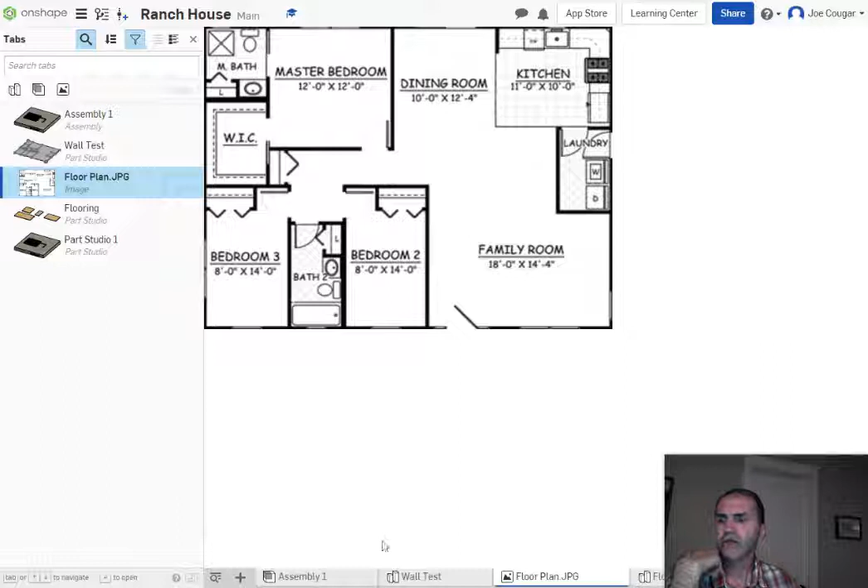So here we go. Let's start a new one, and by the way, I am in this - I know you don't have that floor plan picture, but I do. So start a new part studio. Now when this pops up, let's rename this part studio, and we're going to call it studs. This is where we're going to go to get all our vertical structural members.

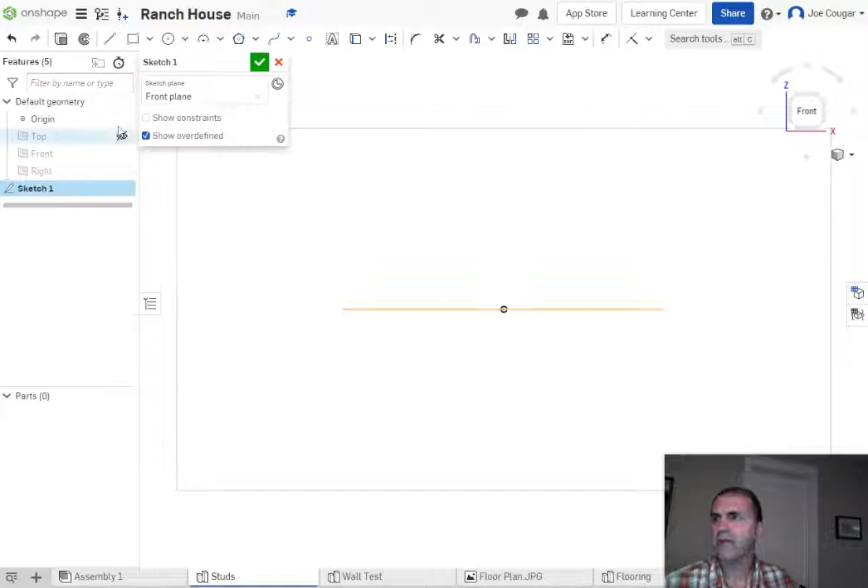Okay, now for this one we're going to sketch in the front. So hover over the front, right click, and say I want to make a new sketch. P turns off planes, N gets you perpendicular, and I also will turn off the origin point because it doesn't matter. All right, now we're going to make a bunch of things.

I'm going to make several boards, even more than I'm going to need, just to prepare. So we're going to make one little rectangle here. Corner to corner rectangle is my command. It is going to be - whoops, I accidentally clicked off of it. If that happens, just use your dimension tool like I just did.

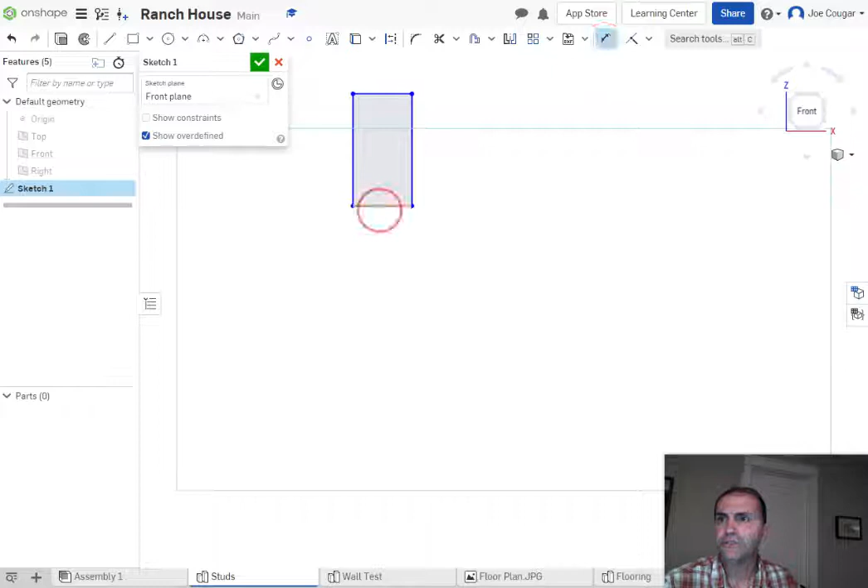And the one dimension is going to be 1.5, because this is all going to be 2x4 construction. Enter. And the other way is going to be 3.5. Now we'll talk about why this isn't necessarily right, because most houses have 2x6 construction on the exterior walls these days, but we're going to deal with that anyway.

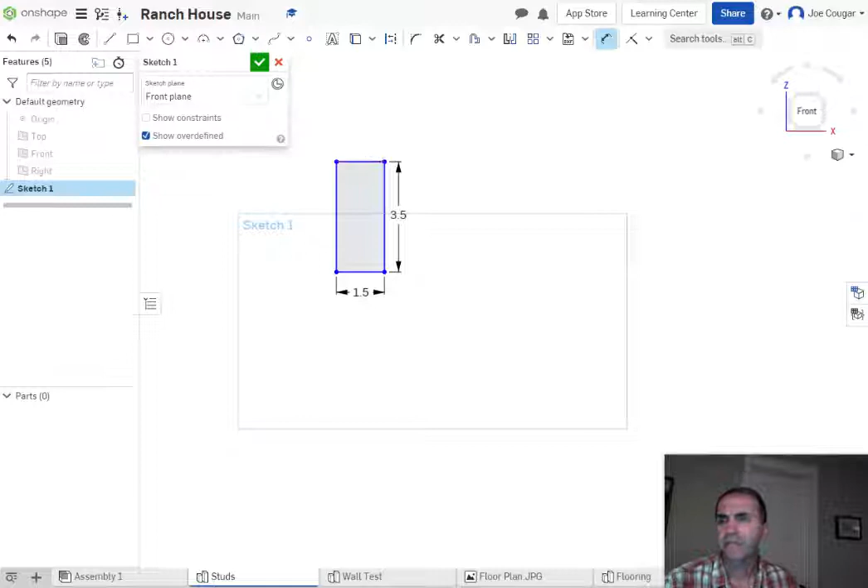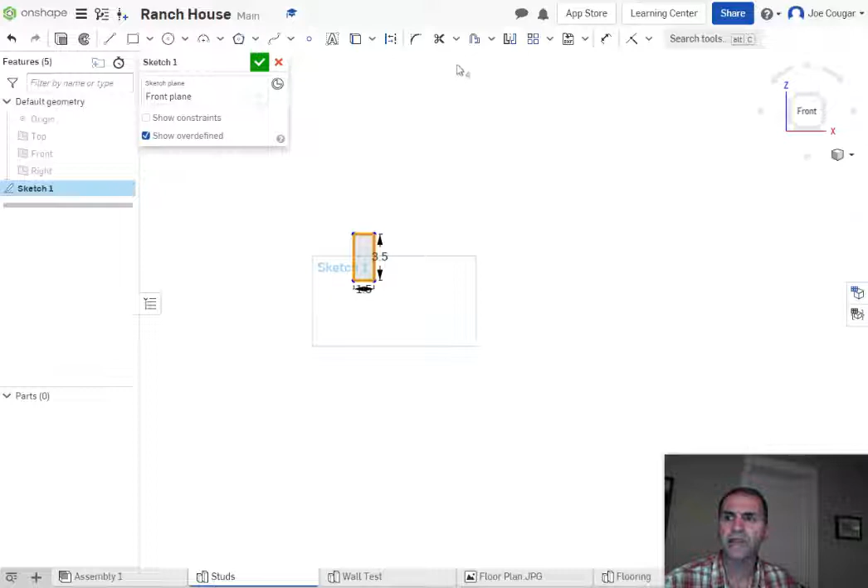Now let's zoom out a little bit. I want to make a pattern out of this, okay, because I'm going to make a bunch of them, like 10. So I'm going to escape to get out of that command. If you click on the mouse and then, as you're holding the mouse button down, drag, it selects what's there. So I'm selecting everything, and I am going to make a pattern out of this.

Now, up here are different types of patterns. I want to make a linear pattern out of that. Now, whoa, that is weird. I don't know what that is. Oh, okay, yeah, this isn't usually the way this works.

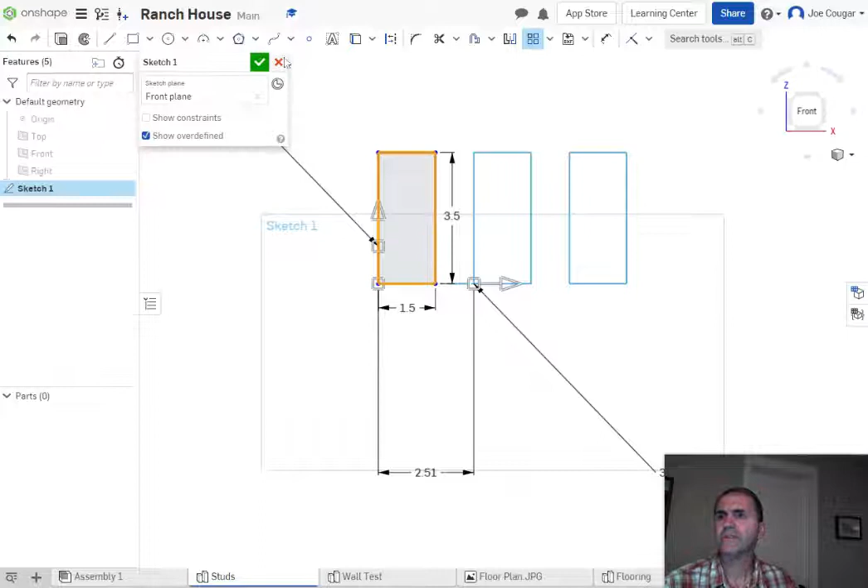Okay, so I'm going to undo that. Sorry, I forgot that this is different than the other programs that I'm used to. And I undid my dimension. There we go. All right, so let me start from the beginning.

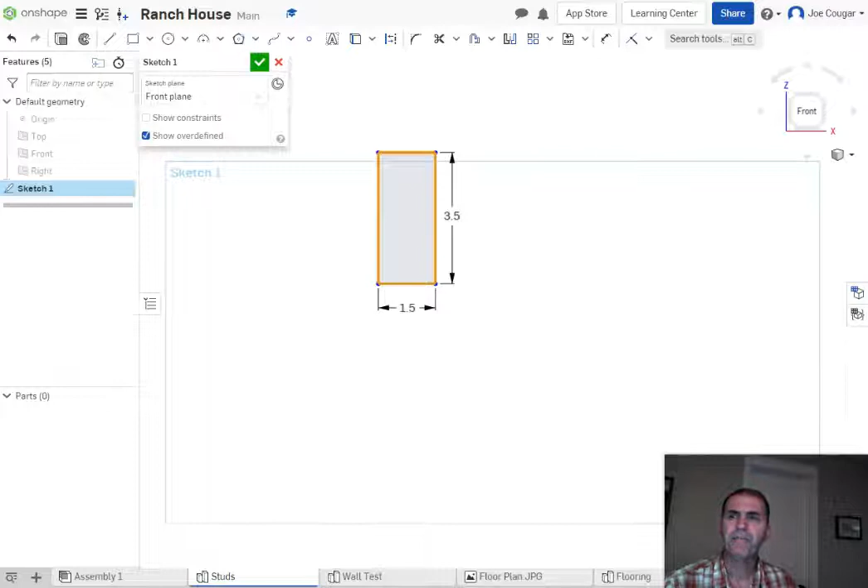We're going to drag a box by holding down on the left mouse button, dragging across to get that. And I'm going to hit linear pattern. Now it's kind of weird the way it shows up like this. It gets a little confusing.

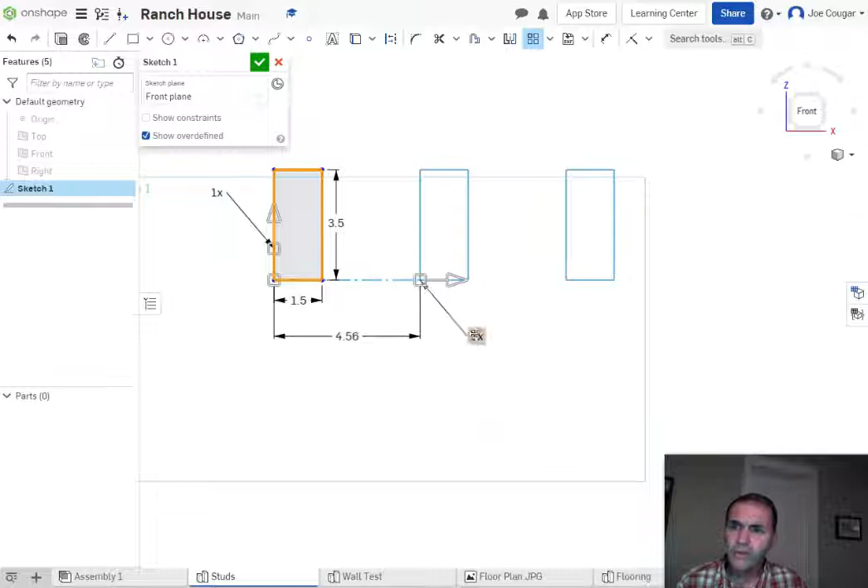So what you're going to do is drag this arrow and pull out. Now it shows you how far apart they are, but by default it will give you 3 of them. So what you do to change that is click where it says 3 times, and let's make that 5. I had to double click it. 5, enter.

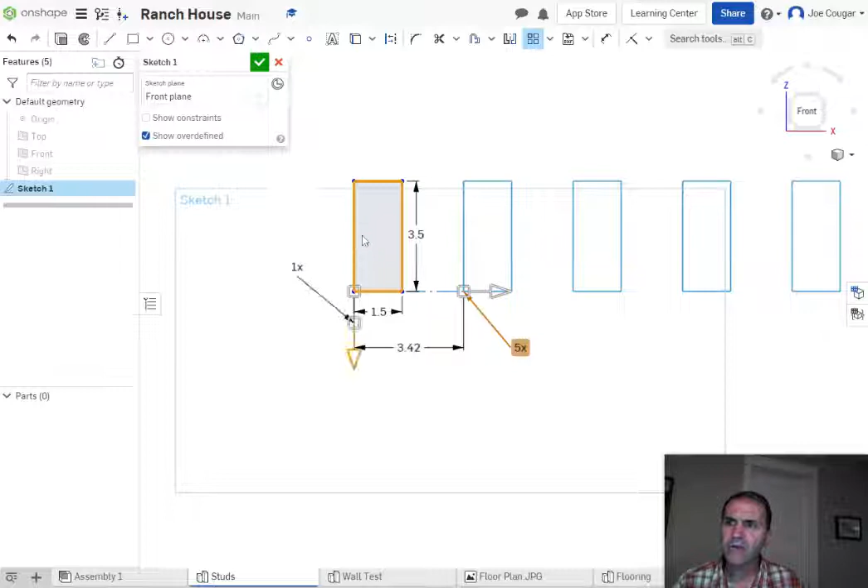Okay, now you can drag this to get more or less space. Let's make it about like that. And then we were going to click on that other arrow to go the other way. It doesn't matter whether you go up or down. We're going to pull on that arrow, and we're going to make 2. Okay, now once we like it and we're good, we've got 10 parts, we're going to left click on the mouse to say OK, and we've got all of these done.

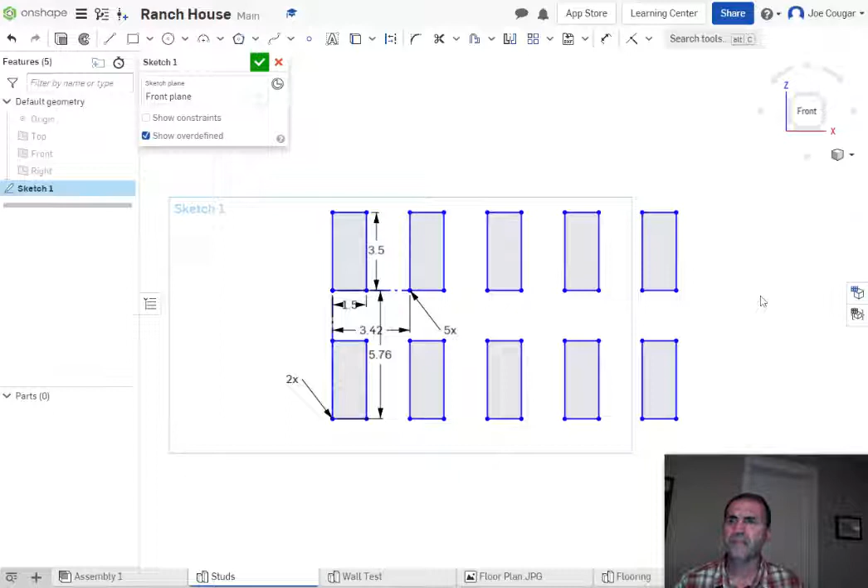Now we're going to say OK to the sketch, okay, and we're going to use this to make a whole bunch of different parts. All right, so for now we're only going to make 4, but then we've got others for later. So we're going to extrude. Click on this first one.

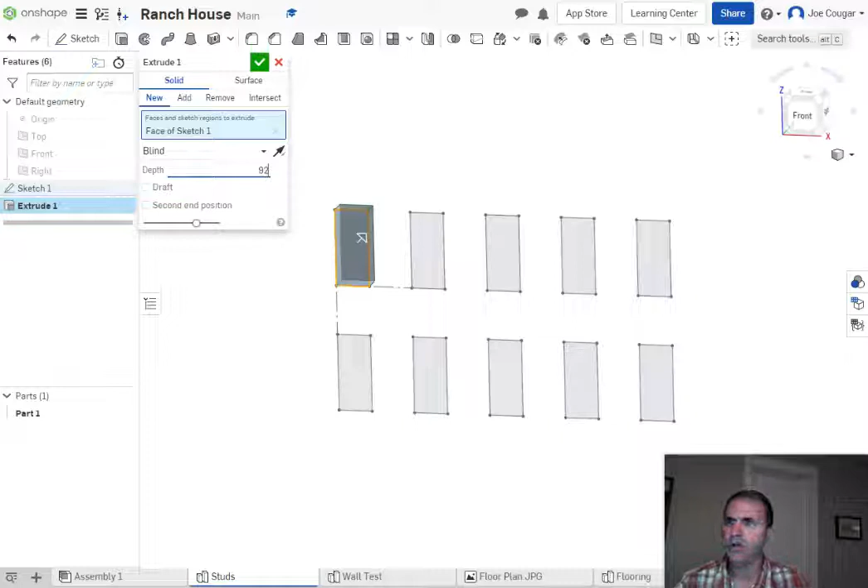Just because I feel like it, I'm going to go the other direction, and we're going to make this 92 inches long. Check, or enter, will give you a little preview. Check does it. Now the sketch went away.

We're going to bring it back by coming up here and turning back on the visibility of the sketch. Click on the little eyeball.

Now, every time we do this, we're going to name the part and we're going to change the material for the part. I know this is a little tedious, but hey, sometimes work is work.

So I'm going to right click on part 1. I'm going to rename that and call this stud. Just call it stud, because this is going to be our standard, let's call it stud 92. Now, in the real world, the stud is 92 5/8. I'll get into the reason for that later on, but we're going to make it easy on ourselves and call that stud 92.

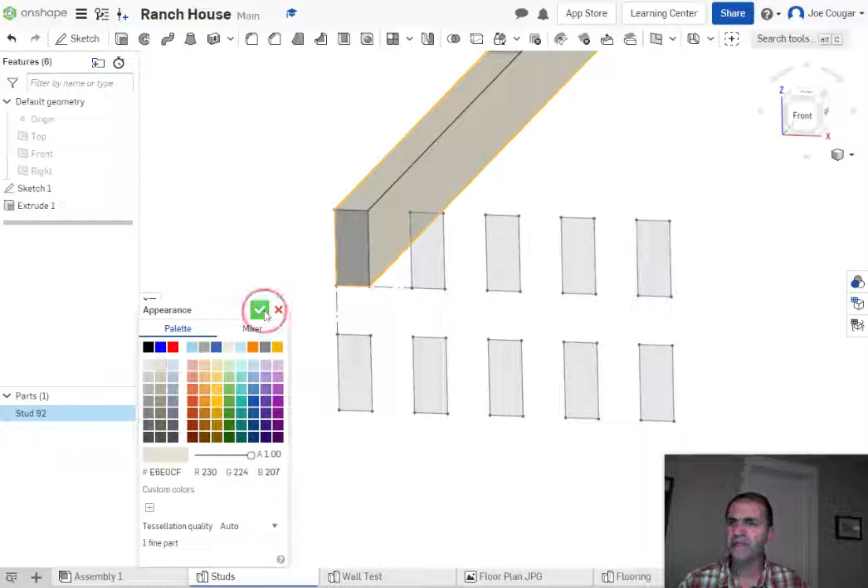Also, let's make these look kind of like wood. So we're going to right-click on that, edit appearance, and just pick a color that you think looks good. I'm going to choose that. I think I'll choose that top middle one right there, and do that for all of them. If you want to make them a different color, you can. It just sometimes gets hard to see if you don't have them the right color, but you do you.

All right, so we have a stud 92. We're going to extrude again. We're going to go the other way. This one is going to be 81 inches. Enter, enter. I am now going to rename this, and we're going to call this a jack stud.

Let's call it a jack stud 81. We'll give each one of them a number. And I'm going to change the appearance to the one that I like.

Okay, next is going to be where we're going to extrude this one the other way, and we're going to extrude that 31.5.

Okay, and we're going to rename that one as Sill Jack Stud, Sill Jack Stud, 31.5. Enter. Let's make it the color I like.

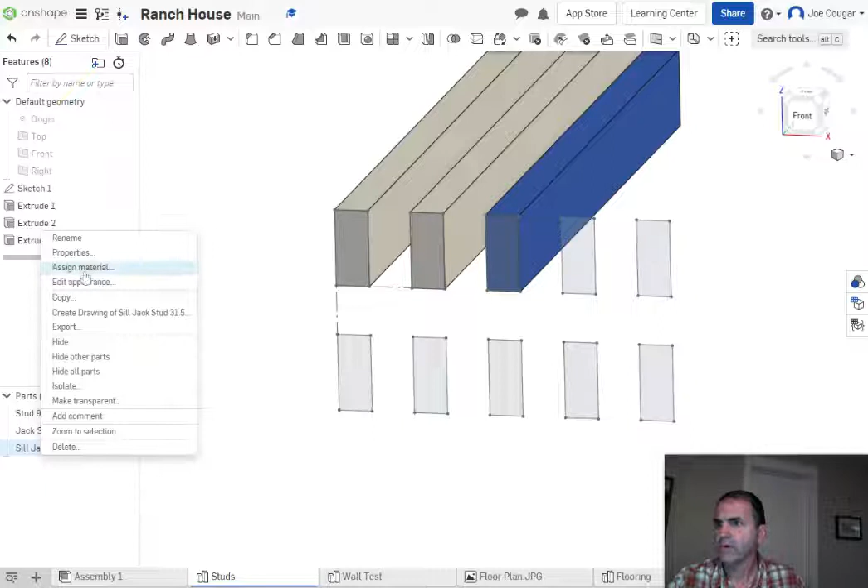Appearance. Jeez. Okay, and I wonder if I can do all of them at the same time. I bet I can. Well, now I don't know because I've only got one more to go. Might have been able to just highlight all of these and hit edit. Yeah, look at that, you could edit appearance. Could have done it at the end. Sorry, all right, next time we know.

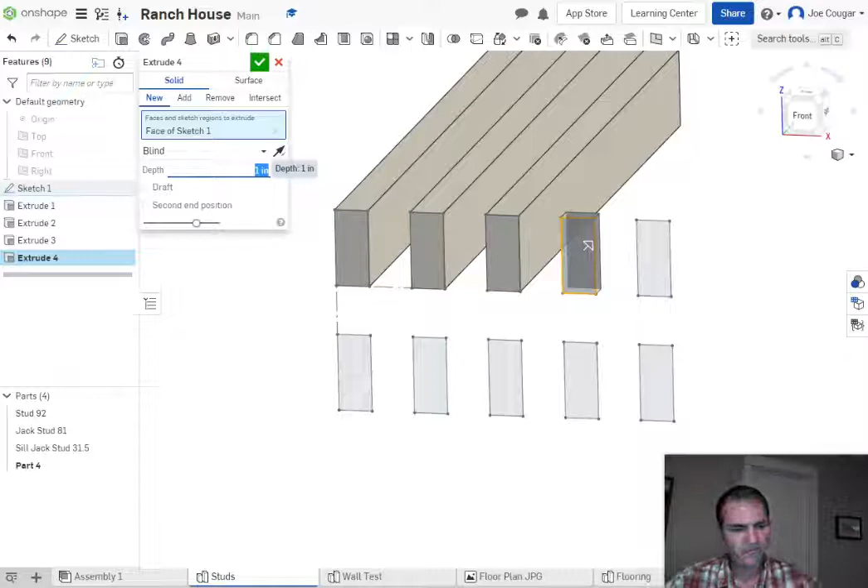So now we're going to extrude that one. Let's go the other direction, and this one is going to be 55.5 inches.

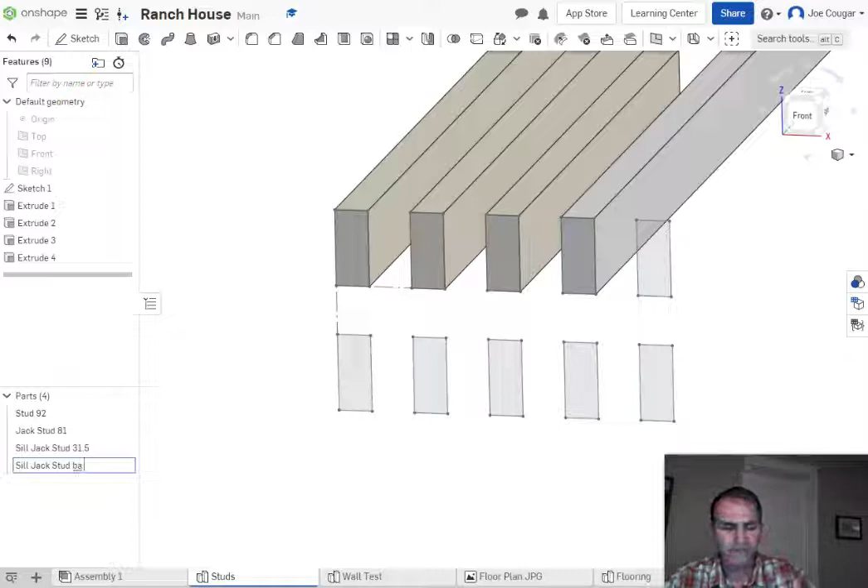All right, and this one is going to be renamed as Sill Jack Stud, and put BA for bathroom, 55.5. And the bathroom windows are higher, so we'll get to that at some point.

All right, we've got that. Now I can go back up here to sketch 1 and turn that off. Okay, and I've got my various studs of various different heights.

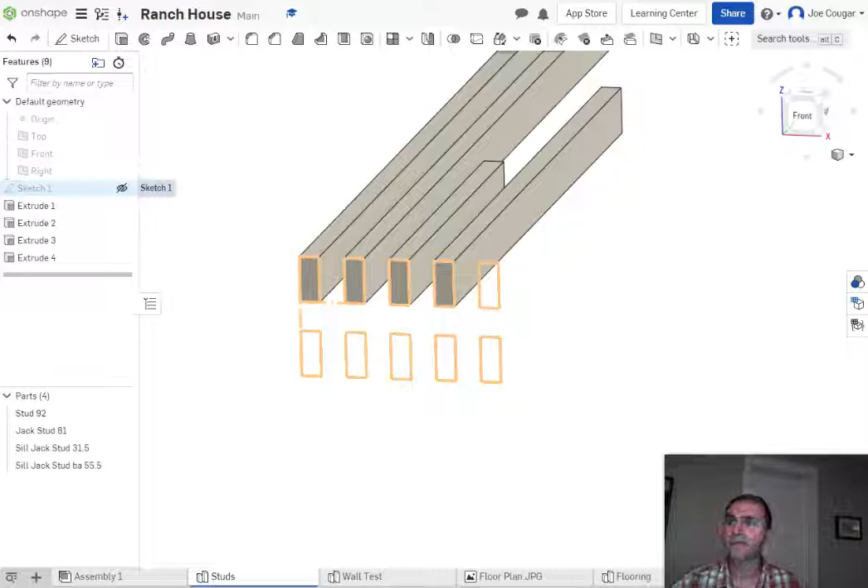All right, now to make it easy on myself, okay, I'm going to go back to this sketch because now I'm going to make some plates, which are the same material. Now, watch this. We're going to right-click on that sketch where we made this, and I'm going to copy that sketch.

Okay, now make a new Part Studio. Click on the bottom, create Part Studio. Right-click on it and rename it, and we're going to call it Plates. These are at the top and the bottom of the wall.

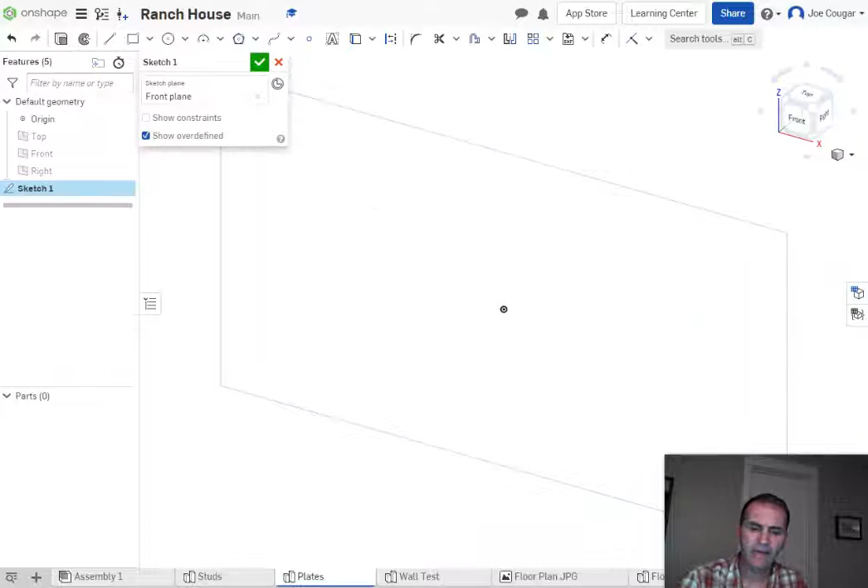Okay. Now, when we go to the front, we're going to go to the front, right click, make a new sketch, hit P for planes and N for normal. And now what we're going to do is right click and paste sketch entities, and check it out, all those things show up, so I don't need to redo them again. And we can say, okay, cool.

Now this time I'm smart and I know that I don't need to redo or color them all, but I'm only making one plate this time, so I can't take advantage of it.

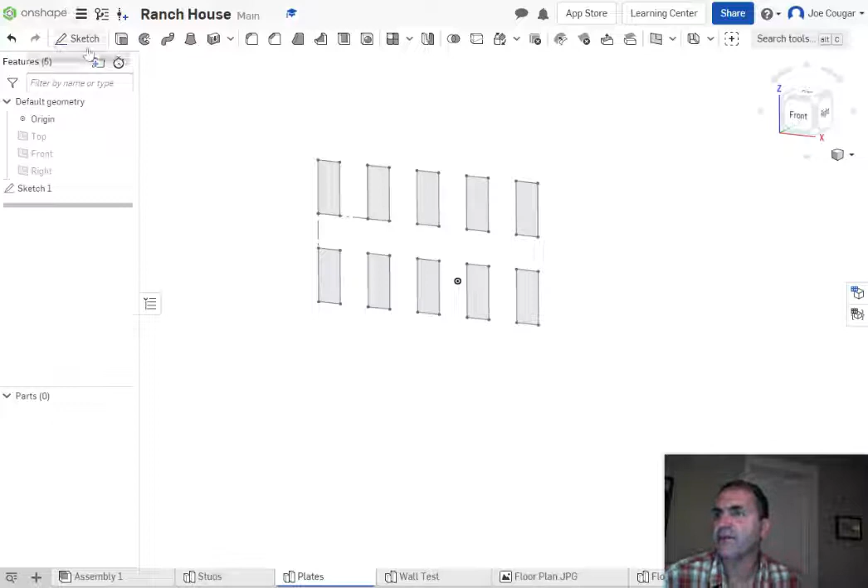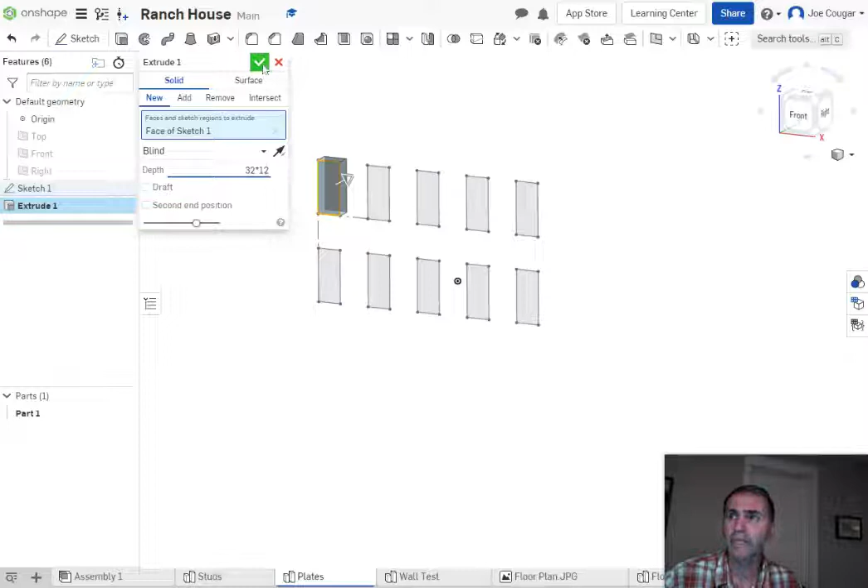Let's extrude the other one. This one's 32 feet, so it's 32 times 12. Now in real life, you can't go down to the lumber yard and buy a 32-foot long board. They max out at 20. But we're not living in the real world right now, so I can do whatever I want.

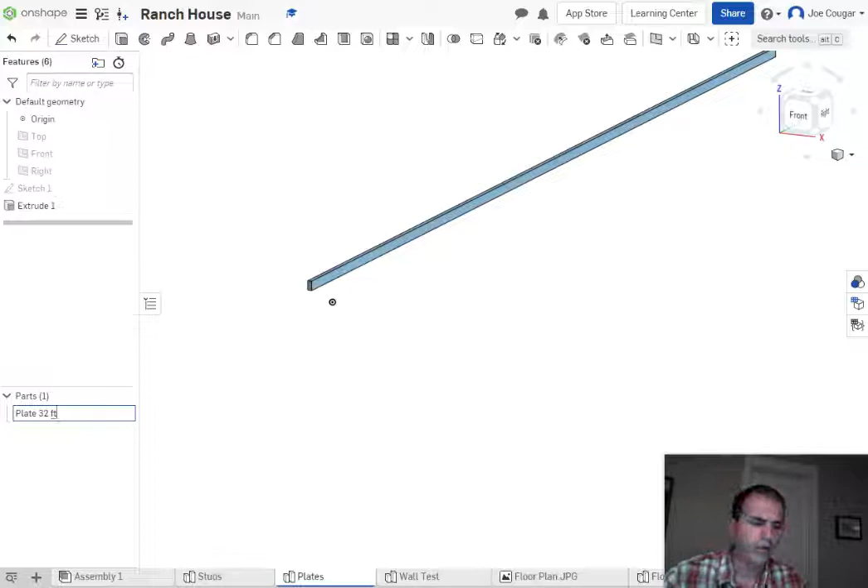Let's go to part 1, rename that, and call it plate 32, and put feet so we know we're not dealing in inches. Okay, and let's make that color.

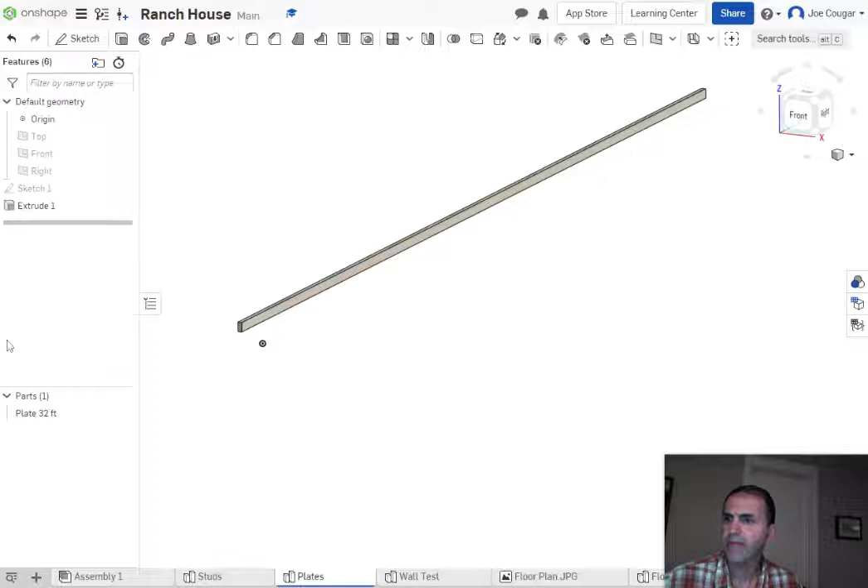All right, so I've got some studs, some plates. I now need to have some headers. So we're going to make some headers now. New part studio, create part studio.

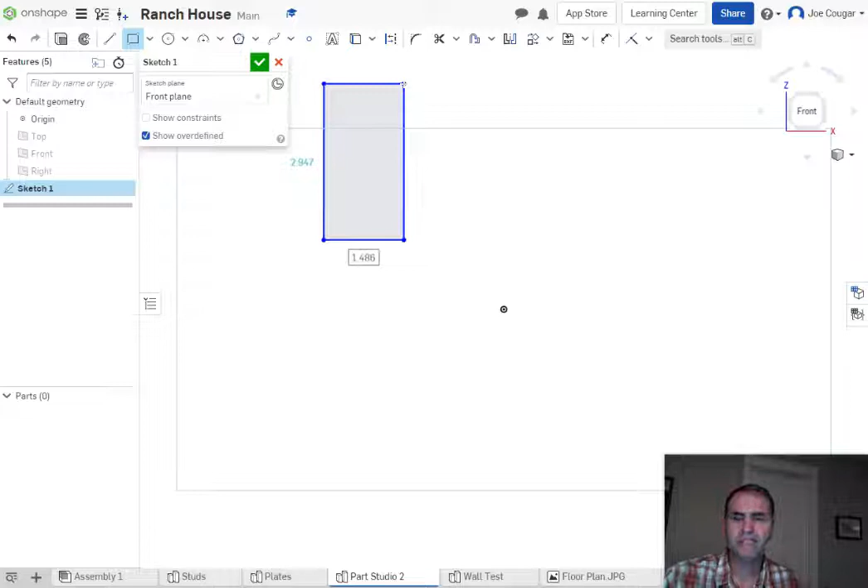Again, sketch on the front plane, new sketch. P for planes, N brings me normal. This time we're going to make some rectangles that are a little bit bigger, because these are going to be the big old header pieces that support weight over a door or window. So these are going to be 3.5, the same as a stud thickness, wide. Enter, and then the height is going to be 11.

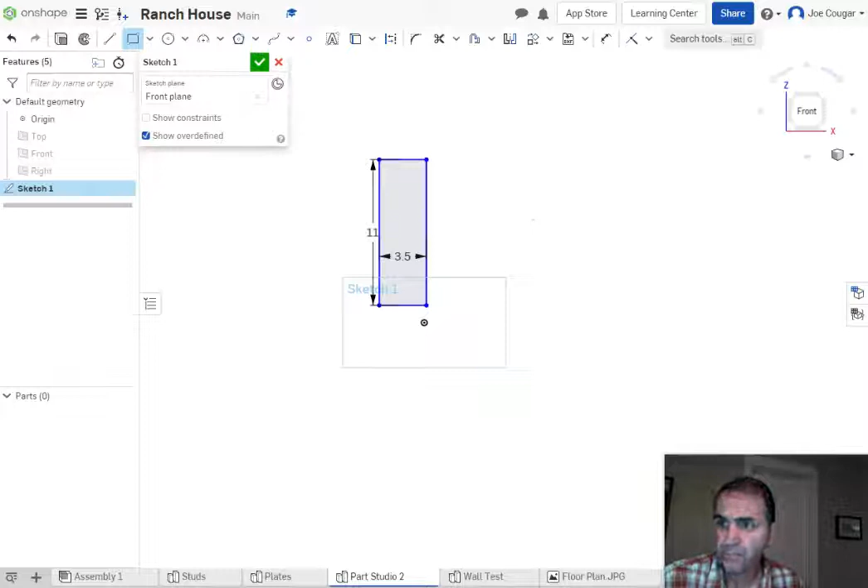Now in the real world, they make these out of a couple of 2x12s that have a half-inch piece of plywood sandwiched in between to make those headers. But we're going to pretend it's just one board. All right, so we've got 11 by 3.5.

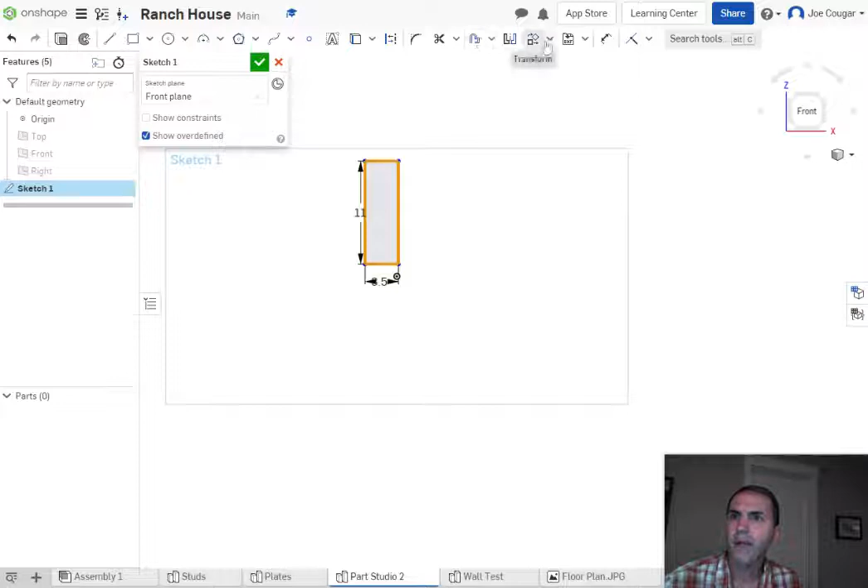Now, because we know we're going to have to make a few different headers, let's do that same thing we did before with making a pattern. I'm going to drag a box around it to highlight everything. Come up here, now I got to find drop-down menus. There it is, linear pattern. Again, grab the arrow to drag it out.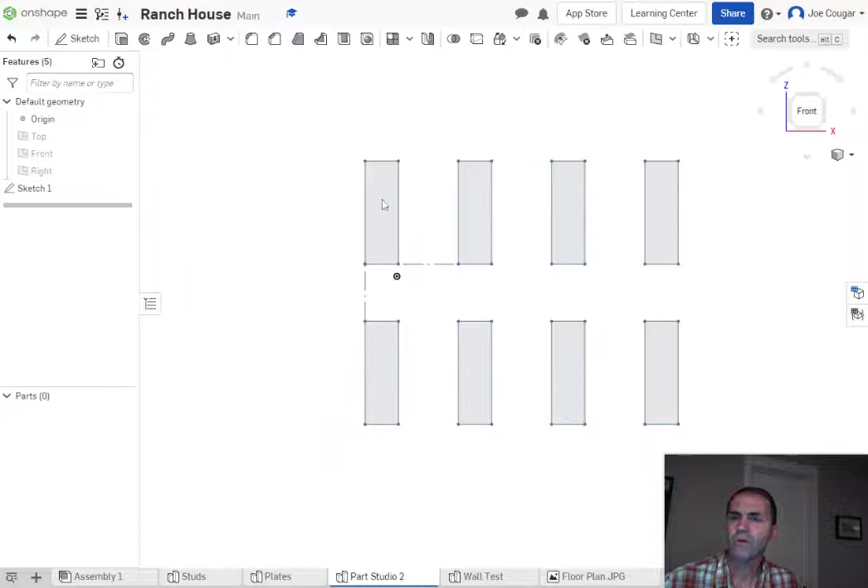This time I think I'll make 8, so I'm going to change that to a 4. And then we're going to take this other arrow and drag it down, so I have a total of 8 of them. Cool. All right, we're going to do 2 today, and this time I'll be smart and do the appearance afterwards.

So we're going to extrude that first one, and that one is going to be 41. I'll explain why at some point. Now let's rename that as header 36 door. In other words, it's for a 36-inch door opening. We'll explain why it's 41 inches long at another time.

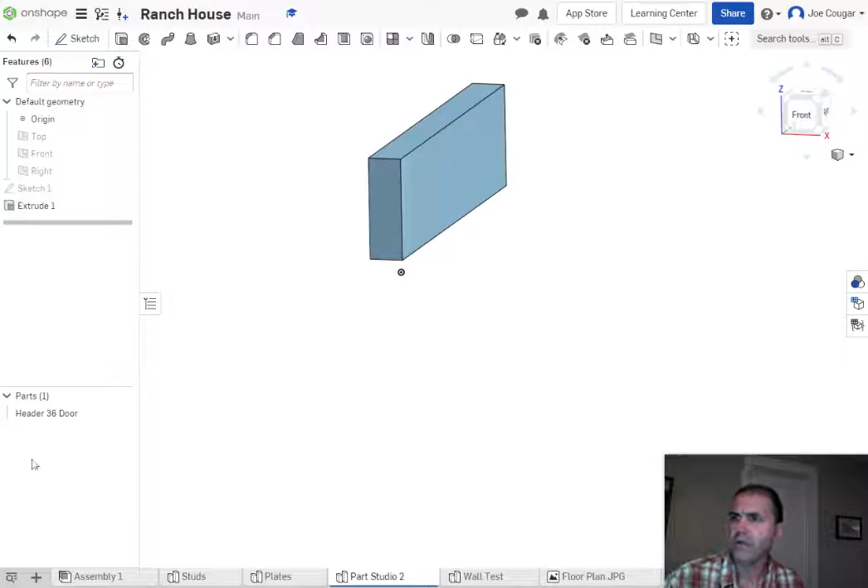Now we're going to turn back on the sketch and extrude another one, flip it the other way. We're going to extrude this one to... uh-oh, I didn't calculate it. I need to think about this. I got a 48-inch wide opening plus 3 inches. It's going to be 51 this time. So it's going to be 51.

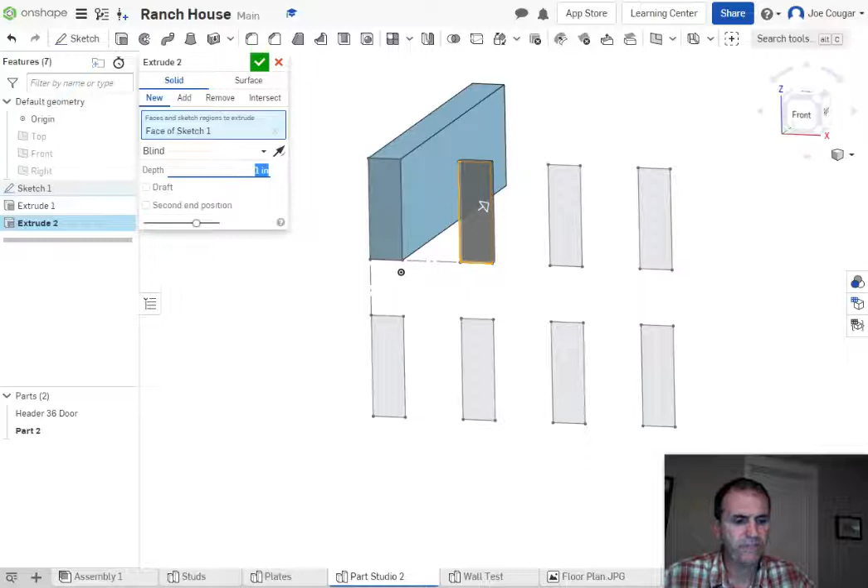Okay, let's come back down here. Part 2, rename that as header 48 window. The reason why it's 3 inches longer than the opening is because we have a 1.5-inch jack stud on one side and a 1.5 jack stud on the other side, if you remember from when we did wall design.

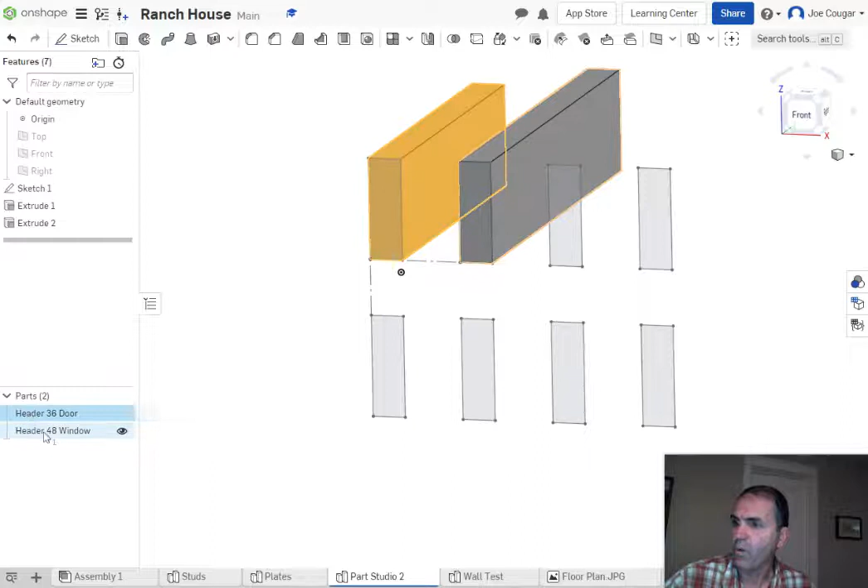All right, now I should be able to do both of these. Click on one, hold the control button down and click on the other, and then I can assign edit appearance for 2 parts and be faster. All right, cool. So now I can turn off the sketch.

Now I've got my headers and my plates and my studs, and we are ready to build our first wall. First, though, I somehow forgot, let's take this part studio that we're working in and rename that as headers.